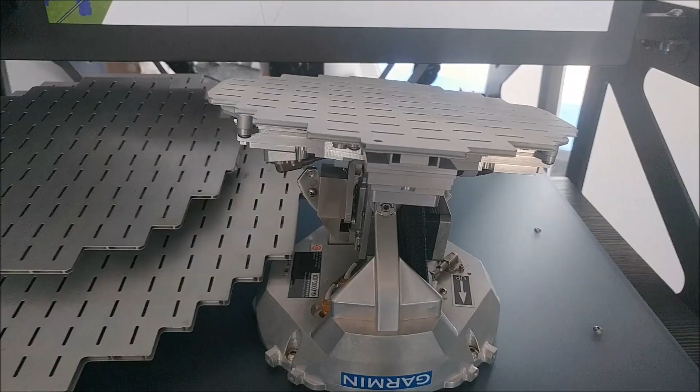Well, we're back from Oshkosh, but let's start out with something from Oshkosh. This is in the Garmin booth, and they had their weather radar system on display. And this is the one with a 10-inch panel, and then you can see off to the side there they got the 12-inch and 18-inch panels. But anyway, this is a $20,000 unit, and with just a modification to the nose cone of the Raptor, this could be installed in the nose.

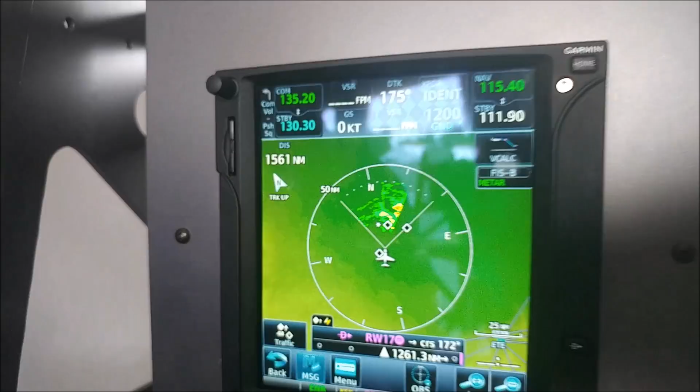And as you can see, it kind of just does the overlay on the moving map there. And for some reason it wasn't painting the full arc there, but anyway, it's kind of a neat setup, and as I said, for $20,000 it could be yours.

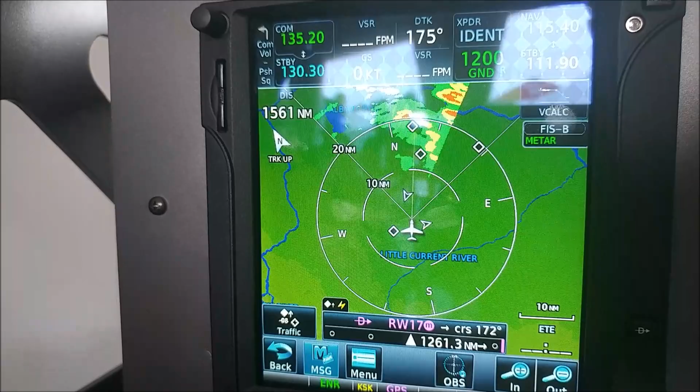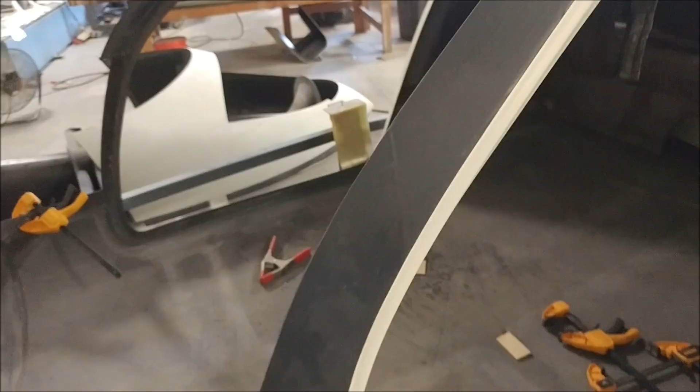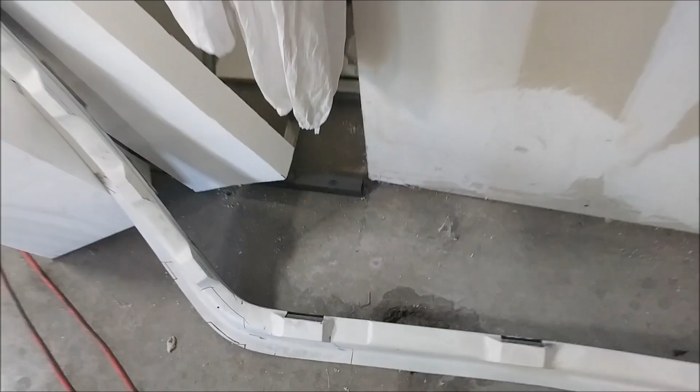So back to reality, and the parachute straps that we were waiting for arrived. So Jeff's gone and cut the openings there in the roof to run those all the way down to the forward bulkhead, and that one that you're looking at was just a smaller one. He's also got the openings cut for the lower receivers for the door hook locks. So we're moving forward with getting things ready for the next set of stuff to be bonded into the fuselage.

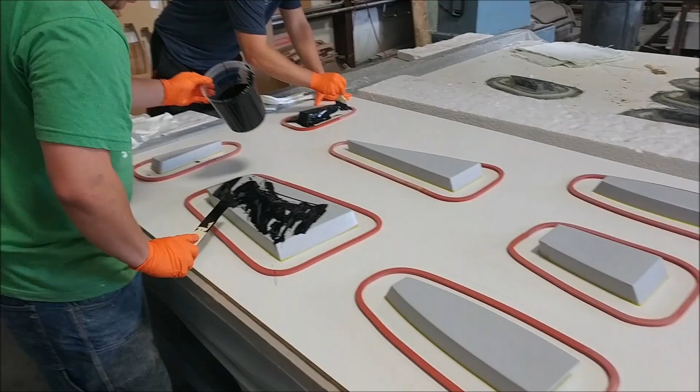And here the guys have been working on doing these rib molds, so getting pretty good at it now, because they've done a whole bunch of them while we were away, and they're still working on the others because there was about 50 something or so to go. So as you can see, they're moving along there.

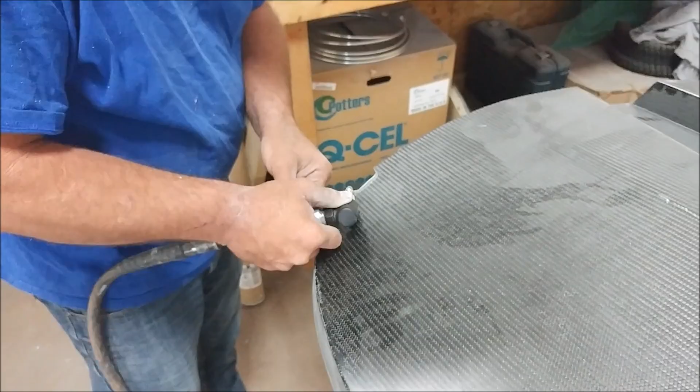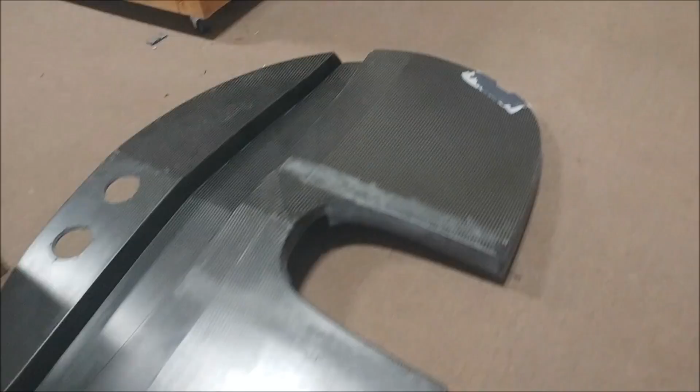And where the parachute straps transition through the forward bulkhead, Jeff's had to sort of make a little opening for that, because this is kind of a change on what we had originally done. So anyway, you can see he just basically cut that back there, and is putting in a little bit of ply there. You see he's gone and plied that back up again to close off the cell where the foam is behind there. So once that's set up, there's not really much more to do before we can actually mold it or bond in the door frames.

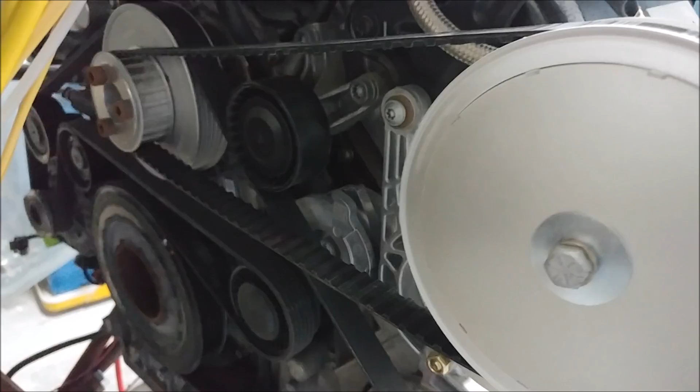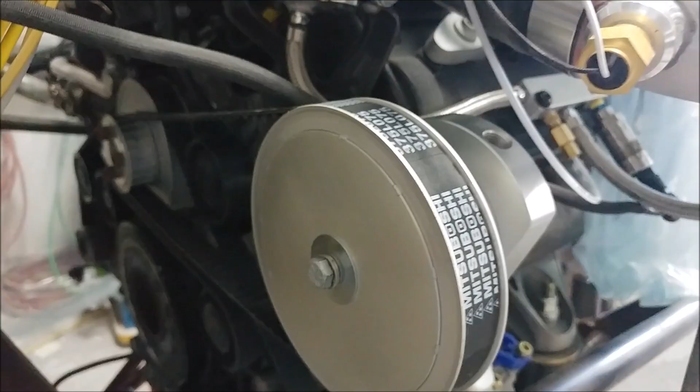And the belt arrived for the governor adapter. So as you can see, I've just test fitted it into place, and it remains to be seen whether we might need to have some kind of idler arm on there, because we'll be able to tighten it up nicely, but we'll see once we get it sorted out there. And I've obviously got to replace that wood bracket there with a proper metal one.

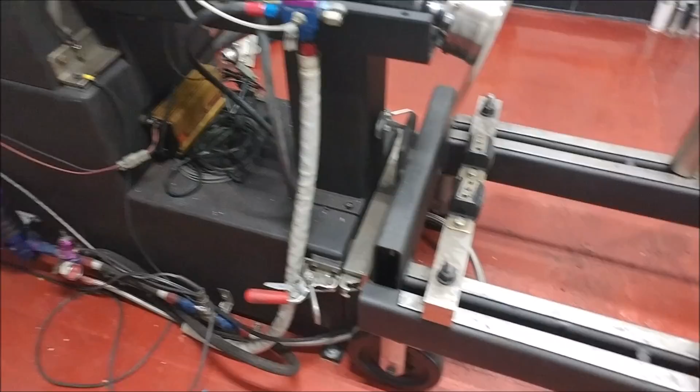And next up, I actually went to the shop today that's going to be doing the dyno testing of our engine, to check out their dyno setup. So here's basically the setup that they have there. It's a water brake, and obviously it's set up for regular gasoline V8 engines. So we're going to have to do a few different things with our engine, but nothing that's going to be too complicated.

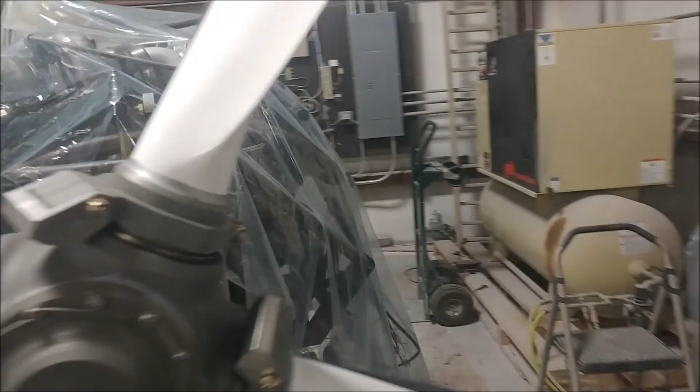So I was back in the shop this afternoon, and even though I've got the engine covered back up, you see I've basically torn down most of the stuff on there, so we can get it pulled out of the engine mount soon, and get it transported over to the dyno shop, and start getting it hooked up there. So that's exciting. I can't wait to see how much horsepower it puts out.

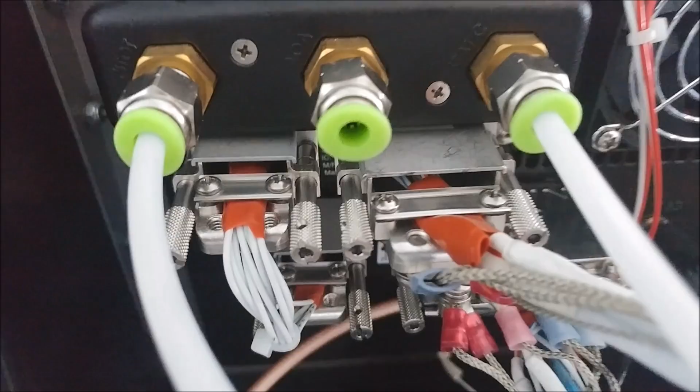Okay, back to Oshkosh, we're looking at avionics. So this is the back side of one of the G3X screens, and that's the GSU-25. That's the ADAHRS system for attitude, heading, and information. And I'm looking at all this, to see how all these cables hook up here, and the CAN bus system, and learning it all, and just seeing whether I was going to be able to understand it all and be capable of doing it. And there you can see it has a video input to that screen as well, so you can sort of embed video in the screen from a camera or something else.

And here's the magnetometer there, and again I was just taking all this video so I can see how they got everything wired up. Not that I'm going to use that, but just so I can have a look at how they did everything. Anyway, so we're just going to go through this all, and these are the 3 different GPS antennas that we'll be mounting on the top of the glare shield. So those are pretty subtle, small. Small ones are only just over an inch big.

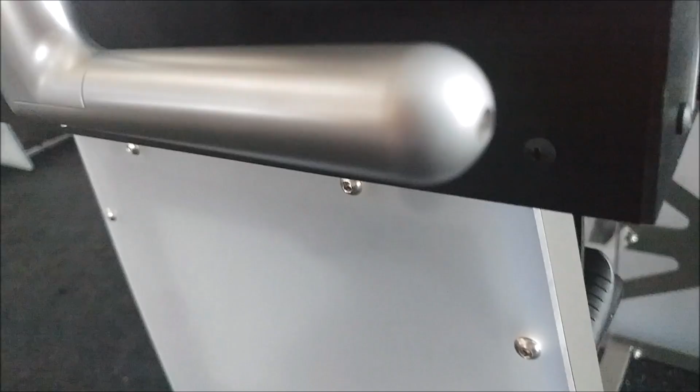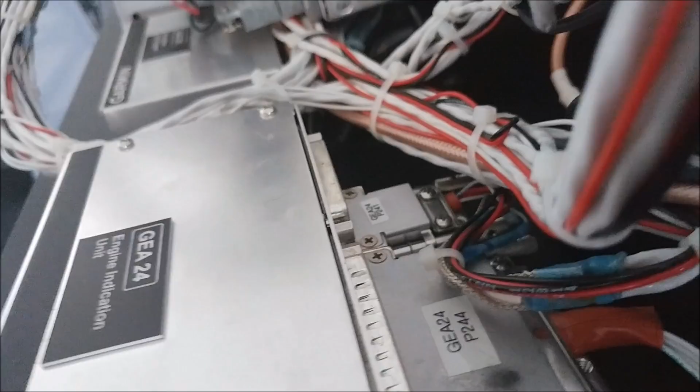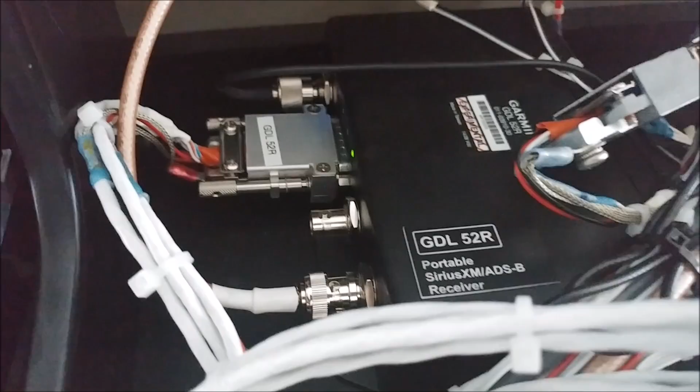And there's the ADS-B unit. We'll actually be getting the 52R, and you could look up that one online if you want to find out more about that. And next up is the 29, so that's the IFR adapter, and that allows you to do IFR operations. And then here's one of the servos for the autopilot, and just basically looking how that hooks up.

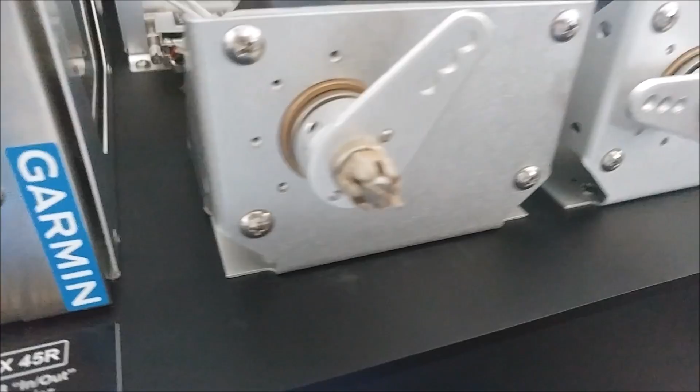And these are all CAN bus connections that they have on there. And you can see we'll be having two of those, one for pitch and one for roll. I won't be doing anything with yaw at this time. And this is the GTX 45R transponder, and that's the one that we'll be getting there. And so you can see the various different connections on the back of that, and we'll basically be installing it the same way that that one's oriented.

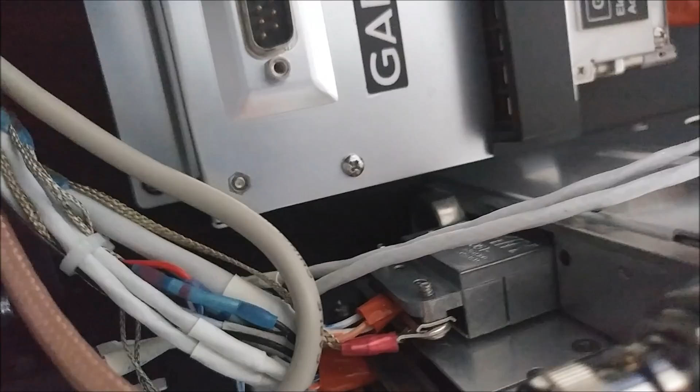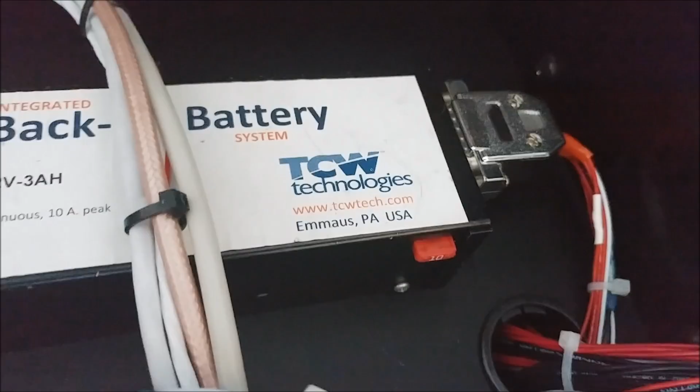So you see there's a bunch of wiring going on there, and different cables and coax and all sorts of stuff, and it looks really complicated, but when you just break it all down, it's not really that complicated. And here's the backup battery system they have on their demo display, and I may end up getting that, I'm not sure yet, most likely, we'll see.

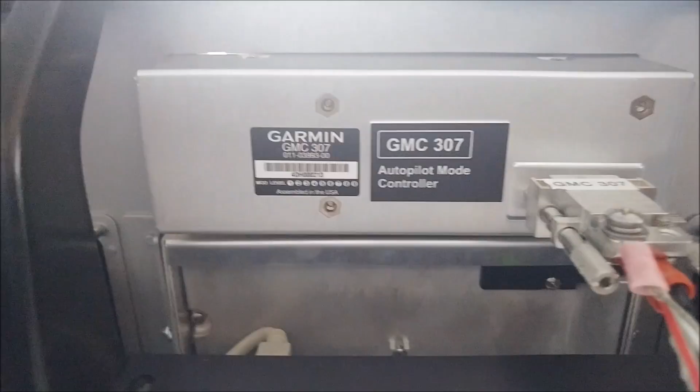And now we're looking at the back and sides of the GTN 750, which is the main navigation unit. So all sorts of different things going on there, because there is one set of radios built into that, as well as all the GPS and a whole bunch of things in there. And this is the back of the autopilot controller that we'll be getting. You'll see that one in a minute from the front side, but it has the altitude pre-select and also the heading bug control in there. You can kind of see it there.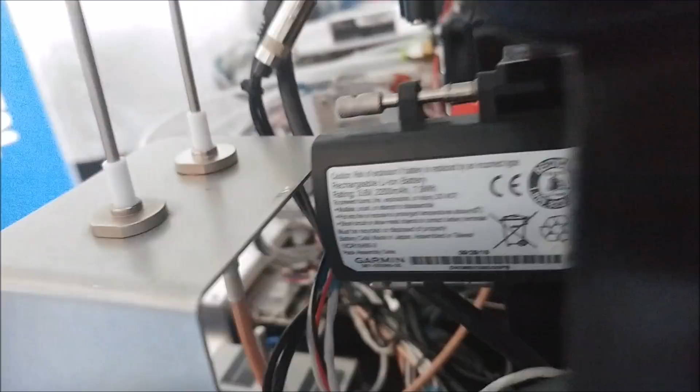And this is the back of the G5, which is the backup EFIS system, and we'll be getting one of those as well. So that way, if your primary, and even if all of your other displays go out, you'll still have a PFD available there, so you can still get all your attitude information, airspeed, altitude and that sort of stuff. So it's kind of nice to have that. And there you can see the front side of it.

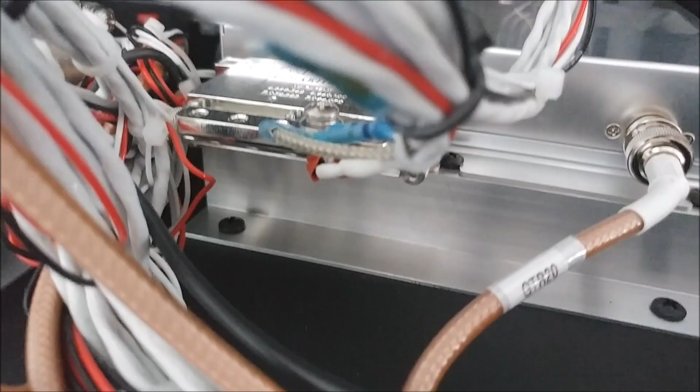And now we're looking at the GTR 20. So this is a remote mount sort of secondary radio set. So you will have COM1, COM2, and this will end up being all the COM2 stuff. And again, it's a hidden unit, so you don't actually have a control panel for it. It works through the other units.

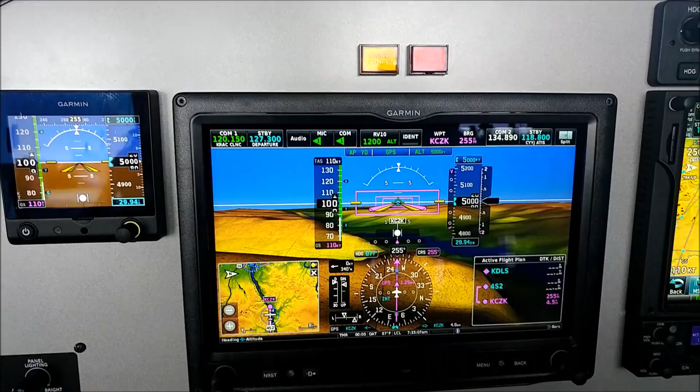And just to show you the front again of how the whole system looks, we won't have that radio in there at the bottom, and the 750 will be down in the center console, and then the autopilot head will be up under the glare shield. But basically we'll have the G3X there, and the G5 there that you can see. And there's audio plugins there. So anyway, the next thing for me to do is to start laying all this stuff out in CAD, so I can have a good picture of how it's all going to work.

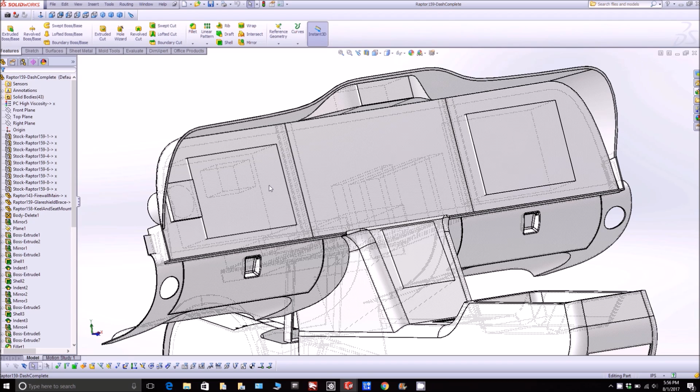And here you can see I've got just the parts displayed now for the panel, and starting to put things in place. So there's one of the G3X screens, and there's the other one. And then down here in the center stack, that's going to be where the 750 is. And then over there on the side, that's where the G5 is going to live. And then up the top there is where the autopilot controller is going to be.

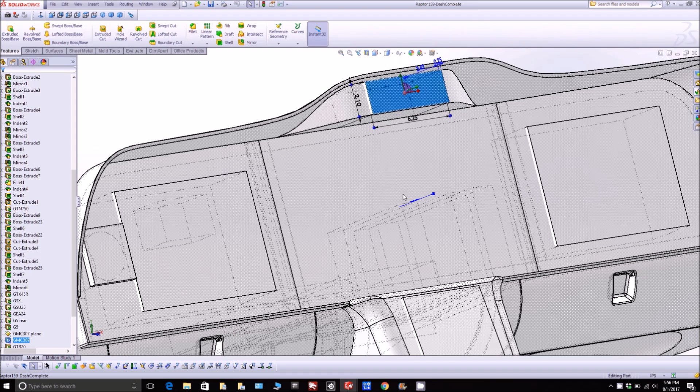And in the middle there, we're going to have a 10-inch tablet on one side, and that'll be Android or iPad, most likely Android. And then on the right-hand side, we're going to have a Windows tablet, and that'll be displaying the engine information from the MoTeC ECU. And that's just for the prototype. For production aircraft, there'll be a big screen in the center there.

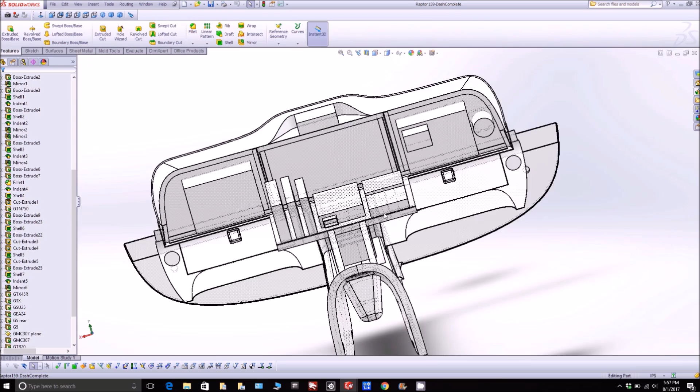So looking around the back there, you can see I'm starting to lay out how everything is going to basically live there. And I've created this little platform, and some supporting brackets for that, which mount on the keel to give it enough structure. And I'm starting to lay out the different components there. So in the center, I have the Vertical Power VPX, which is the one controlling all the electrical system.

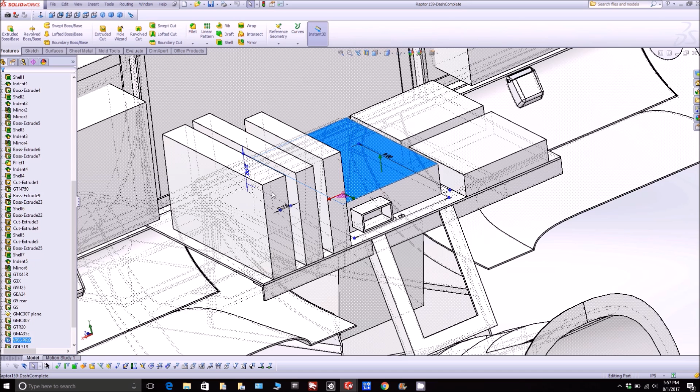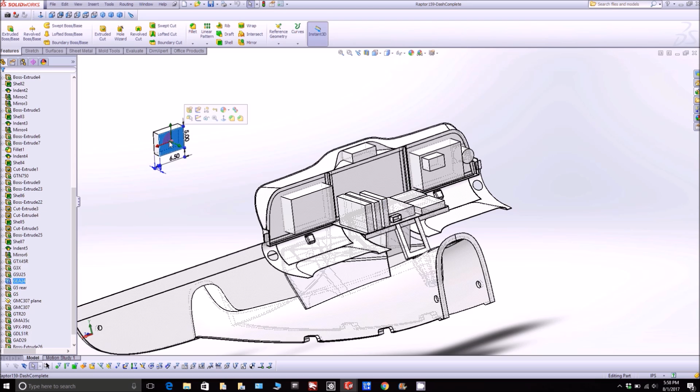And over here on the left, I have the transponder, the GTX 45R. And then we have the GTR 20 secondary radio, and then the remote audio panel, and then the IFR adapter, the 29, and then we have the ADS-B unit there. So everything's starting to come together, and the great thing about SolidWorks is it has a routing function, and then there's the engine control unit, which can actually live in the engine compartment. Anyway, they have a routing function that allows you to set up all your wiring and stuff, so you'll see some more of that in the next update.